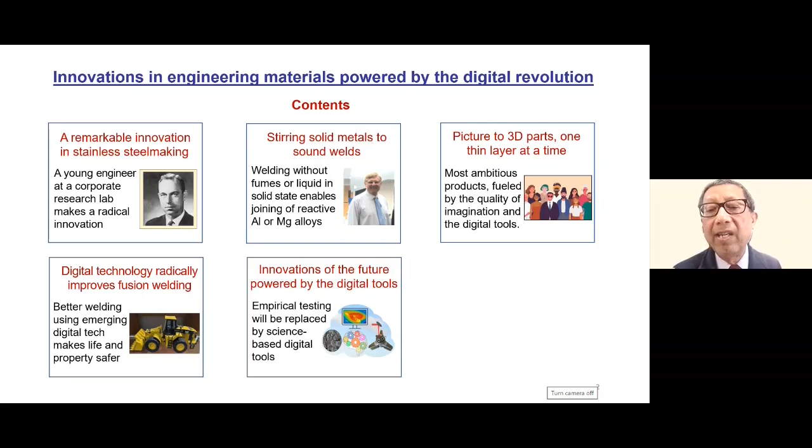Finally, I cannot overlook that this is a talk in which many of the interested people are in the sector of automotive and farm equipment. So I want to talk a little bit about some work we did for Caterpillar and what we have learned from those types of work, specifically emphasizing how digital technology is radically changing the way we answer important questions of industry, and also how we solve day-to-day problems. And finally, what about the innovations of the future? How are they going to be helped by the emerging digital tools?

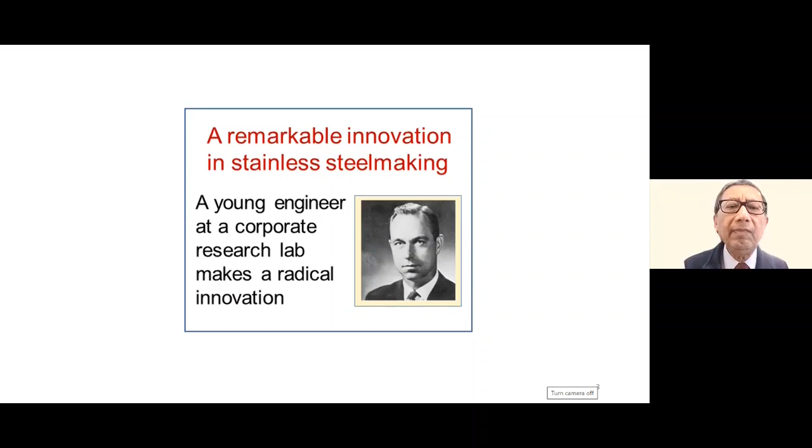So in order to avoid the oxidation of chromium, we first oxidize carbon, lower the carbon content to our desired level, and then add ferrochrome. Ferrochrome costs about $1 a pound for the low carbon variety. We cannot use the high carbon variety of ferrochrome, which costs much lower, 50 cents per pound of chromium, because if we add higher carbon containing material and try to oxidize that, we will oxidize chromium as well. So selective oxidation of carbon is not possible in the electric furnace.

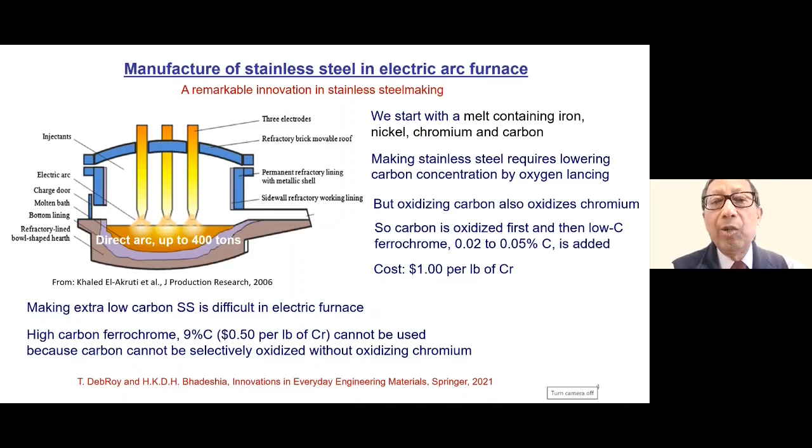That was the problem. Now I switch gears, and you have the context. I want to take you to a story of a fresh graduate obtaining his doctorate and joining the Union Carbide Company in Niagara Falls, a city most people visit for a very different purpose. You know what that is. But Krivsky, the young engineer, 27 years old, was doing experiments using iron carbon chromium melts that he was oxidizing with pure oxygen. The purpose was to create thermodynamic data in the iron carbon chromium system.

So he found after one or two experiments that the temperature of the bath was shooting up to about 3000 degrees Fahrenheit because of exothermic heat. So he thought this is not acceptable. He needs to maintain the temperature to a constant lower value. So he thought he would reduce the oxidation rate.

After all, rate has nothing to do with the thermodynamic equilibrium. So he diluted the oxygen with argon, expecting that the rate of reaction would be lower, and so he would be able to do isothermal experiments at lower temperature. He did a couple of those experiments, and to his surprise, he found that the carbon content was very low, lower than 0.01 weight percent.

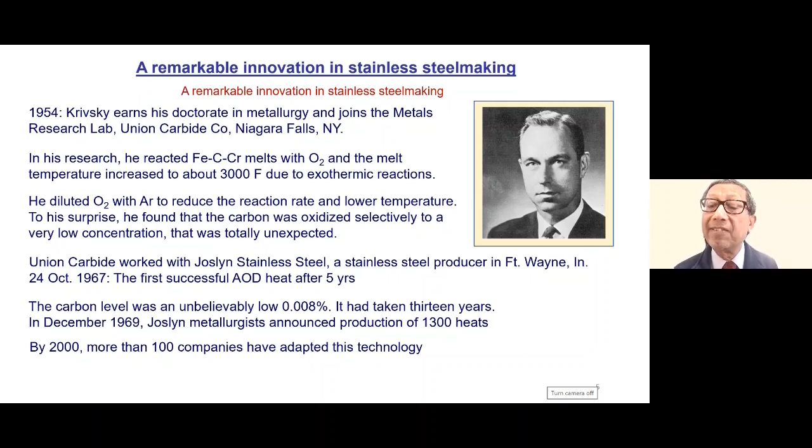They are lighter than the metallic melt, and at that time, chromium oxide gets reduced by the carbon in the melt to form chromium. So we don't lose chromium as chromium oxide anymore, but we recover almost all of the chromium in the bath. So we can selectively oxidize carbon without oxidizing chromium. And this is the ultimate in stainless steel manufacturing.

And carbon monoxide gets diluted with argon gas. So because the partial pressure of carbon monoxide is reduced, the forward reaction goes at a very high rate and we recover all the chromium. Remember that high carbon ferrochrome can now be added because we can oxidize carbon without oxidizing chromium.

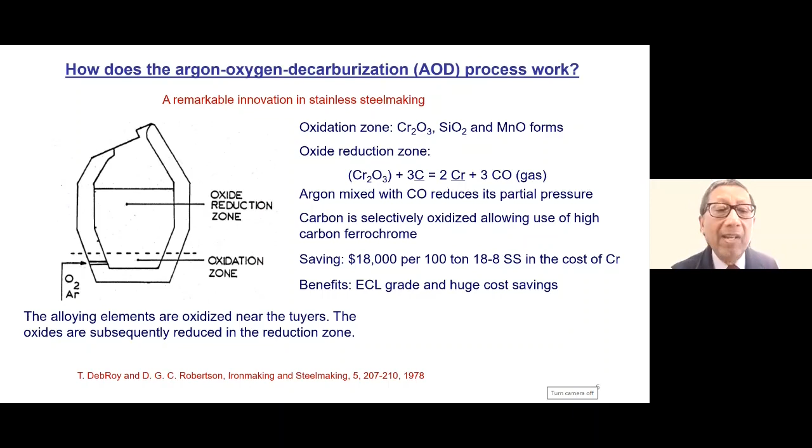Now, what made this innovation possible? Of course, Krivsky expected to write technical papers, but his research did not end up in equations, charts, and research papers. It ended up as something very radical in the stainless steel industry that touches the lives of all people in the world. And this disruptive technology, of course, started with the spark of an idea, but it didn't stop there. There were lots of hurdles, and it took about 13 years total, in which nobody gave up, particularly the corporate R&D. They supported him and they supported other subsidiaries to make this innovation possible.

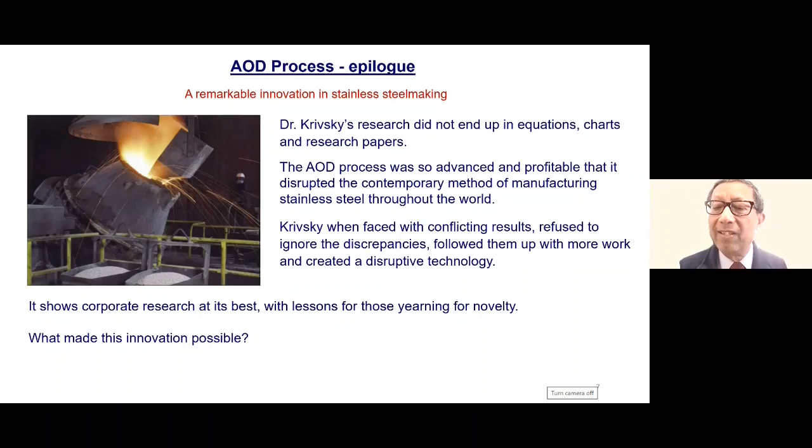I want to change gear and move to another innovation that is equally astounding. This is Dr. Wayne Thomas at TWI, which is a research organization for welding.

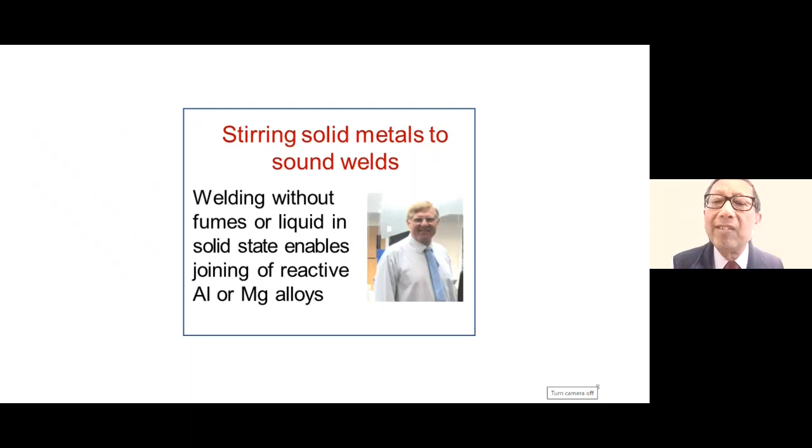And he was playing with friction welding, and he found that sometimes it is very easy to generate a lot of heat without melting the materials that we were supposed to join. And it works like this.

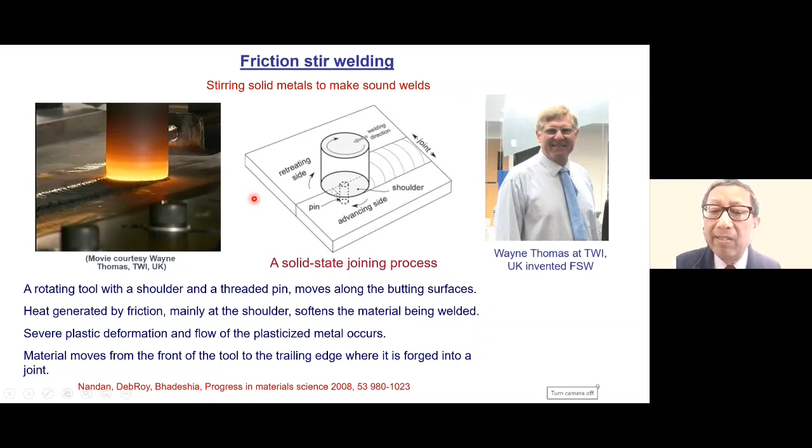There is a tool with a large shoulder and a tool pin. The tool rotates at a high speed with a large amount of friction between the tool shoulder and the material. As a result, we generate a ton of heat so that we get white hot temperature at the tool, but no melting, no fumes. The metal is plasticized. It moves to the rear end of the tool as the tool moves forward and is joined.

Now, most of the work was done on aluminum alloys, and today, the world's largest robotic friction stir welding machine stands 52 meters tall in New Orleans, at a facility owned by NASA that makes the world's most powerful rockets. You are seeing the picture of a liquid hydrogen tank that can hold about 537,000 gallons of liquid hydrogen.

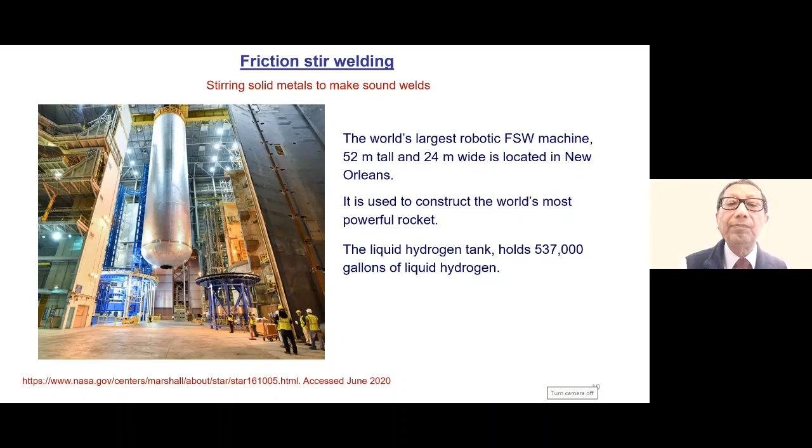So this is a very critical application, but NASA uses friction stir welding technology for their rocket engines. Here is a senior scientist talking to his grandchild, and he says, this part can only be made by friction stir welding.

And the grandkid asks, no melting, no fumes, no sparks flying. Is this really welding? This is pushing the limits of technology.

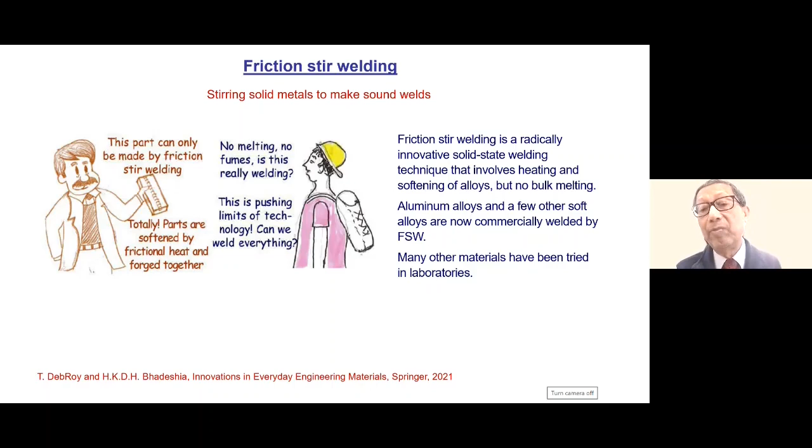Can we weld everything? Of course not. We can right now weld very ductile alloys like aluminum alloys, but we are trying to make this possible for other materials like steels.

So what happens when we try to do that for steels? Somebody has an idea and the perseverance to make this demonstration and show that it is economically very attractive to weld aluminum alloys, particularly for the automotive and farm equipment sectors.

Here is the problem. The senior engineer goes to the CEO and says, we could weld aluminum alloys very well, but when we try to do this for steel, we have a huge problem. The tools endure a lot and ultimately they break. At what cost? $150 a meter? No, that is too much. And the CEO is stressed out.

So it falls on researchers to find a solution. And one of the tools that we have developed in the last 20 years or so is to simulate. Do the work in a computer before you actually weld the stuff, because then you can learn what the outcome is going to be. If you don't like the outcome, you change your parameters. You can test out numerous different scenarios before you spend money and time. This opportunity was not there before.

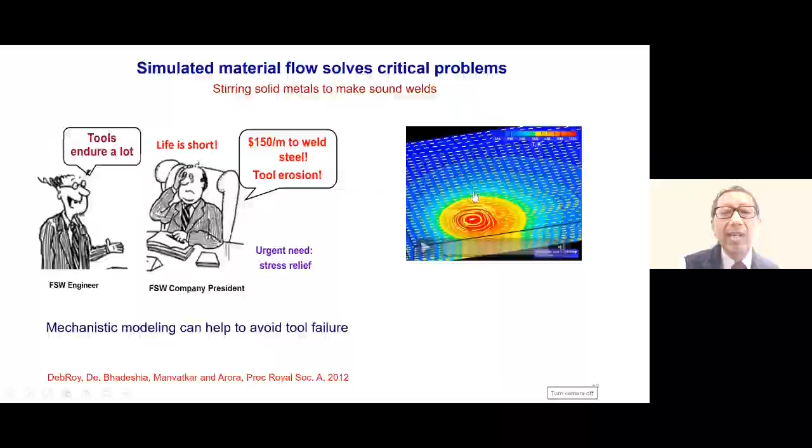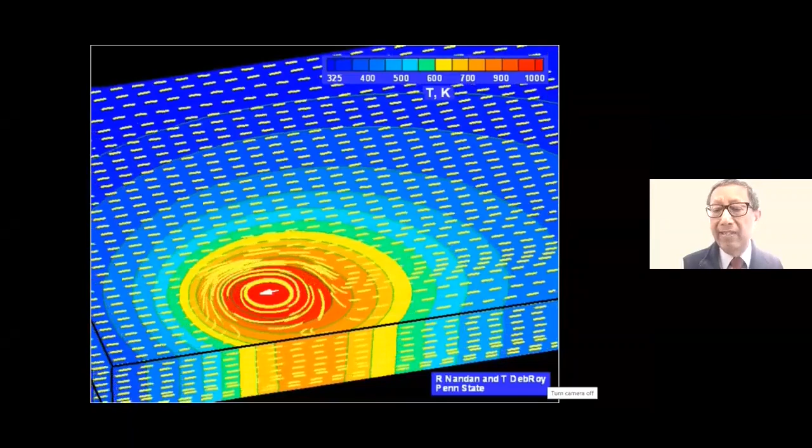So I want to show you what the simulation looks like. Here is a simulation, with the tool right in the middle where the arrow is. It is generating heat, and the colors in different locations indicate temperature. We can also calculate the stresses on the tool, the torque, and so we know the outcome before we actually do a single experiment. This opportunity was not there before computations became inexpensive. A $600 laptop can simulate the process in less than half an hour.

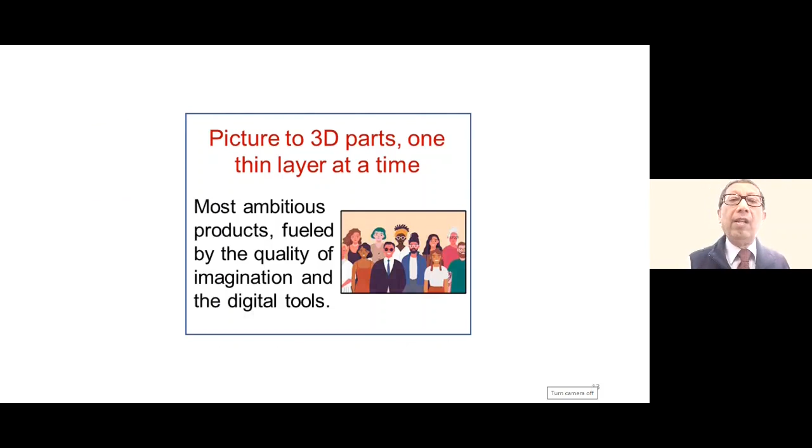So I want to change gear again, and take you to a radical innovation that took over 20 years to mature. Things that seemed impossible just a few years ago can now be made. So what happens here? We make 3D parts, one thin layer at a time. How thin? Sometimes thinner than a human hair.

So here is a powder bed fusion process in which we can make complicated shapes. We can make site-specific chemical composition of a material, and we can make stuff that has internal cooling channels, very attractive for the automotive and farm equipment sector. And most important, the same equipment can produce one component today, and tomorrow if there is a need for making another component, that can be made as well.

So what happens is we spread a thin layer of metal using a roller and then use a heat source, in this case a laser beam, and we melt selected areas of this layer. Then we spread another layer and do the same thing, progressively depositing many thin layers to make a 3D component.

In this case, I am showing a Nittany lion, our mascot for Penn State, being made by the powder bed fusion process. There are other varieties of additive manufacturing called directed energy deposition using a laser beam or an electron beam, or directed energy deposition using an inexpensive gas metal arc heat source.

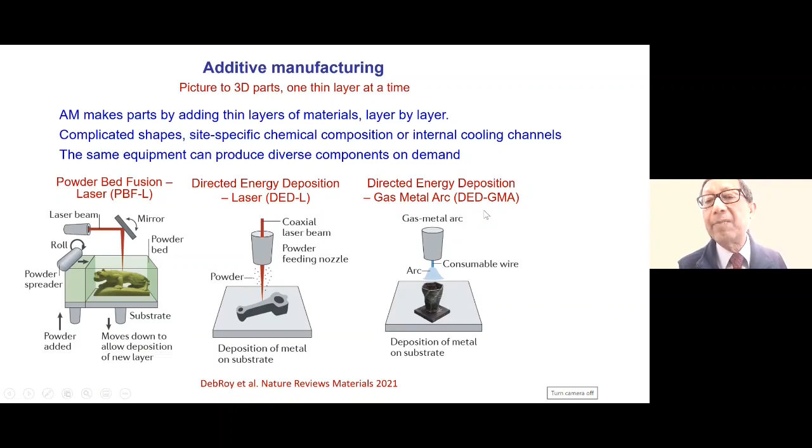So what are the unique advantages of this type of deposition? General Electric, the largest manufacturer of jet engines, uses a factory in Alabama to make fuel nozzles. Fuel nozzles used to be made by assembling 20 parts, and today it can be made as a single part, and it increases the reliability of jet engines.

We can make compositionally graded materials. For example, here we have chromium molybdenum steel joined with a nickel alloy 800H. This joint of dissimilar metals is a common thing in the nuclear power industry. We did some research to show that if we can avoid this dissimilar metal joint, which has a severe creep problem after about 30 years, and replace it with a graded joint in which the composition changes gradually, we can increase the creep life by many, many decades.

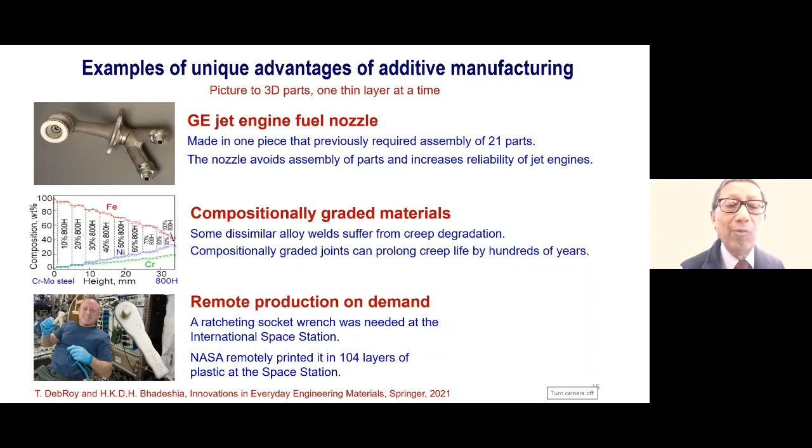One last example: the International Space Station had a message for NASA that they needed a ratcheting wrench, and NASA had no resupply mission planned. So what NASA did was send a design for a 3D-printed socket wrench to the space station from Earth, for the desktop printer inside the space station. They remotely printed a ratchet in 104 layers of plastic at the space station, and all the commander had to do is open the drawer and pick it up.

That's it. So what do we make today? Starting from a pulley to a hip joint, to gas turbine blades, to fuel nozzles, to hydraulic valves, to a customized bottle opener. Everything can be made. But does that mean innovation has stopped after we've devised a way to make it?

Not really, because how many commercial alloys are there? Over 5,000, right? Of those 5,000 alloys, we can now print only about a handful, maybe 10 to 20 alloys. The other 4,980 alloys cannot be printed.

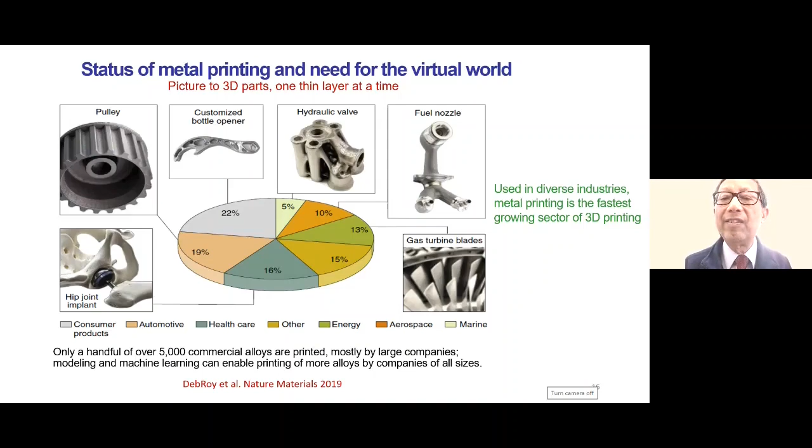But there is hope, because we have a rich and mature knowledge base of metallurgy. We have emerging digital tools, and we have lots of small and medium-sized businesses that are eager to play in this market. But they have to solve many defects such as cracking, surface roughness, lack of fusion, porosity, a ton of other problems, and not least, cost competitiveness. Products have to be such that the market can bear their cost.

But here there is an opportunity roadmap. The roadmap is to integrate emerging digital technology with existing hardware, which will give us rapid solutions so that it doesn't take 13 years, as it did for stainless steel to develop. And most important, these will be based on scientific principles, not trial and error, cut and section and try it out, but using mechanistic models, machine learning, and ultimately digital twins.

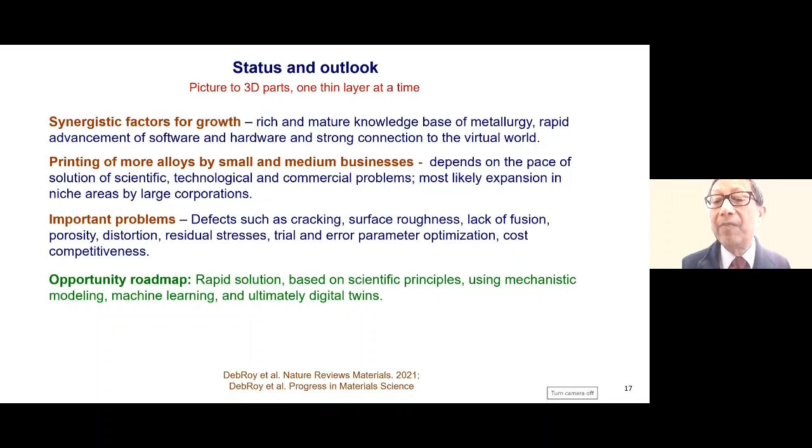General Electric has 5,500 digital twins. Siemens has thousands of digital twins. So this is an opportunity roadmap. Please ask if you can take advantage of the most modern science-based tools rather than do-and-see approaches.

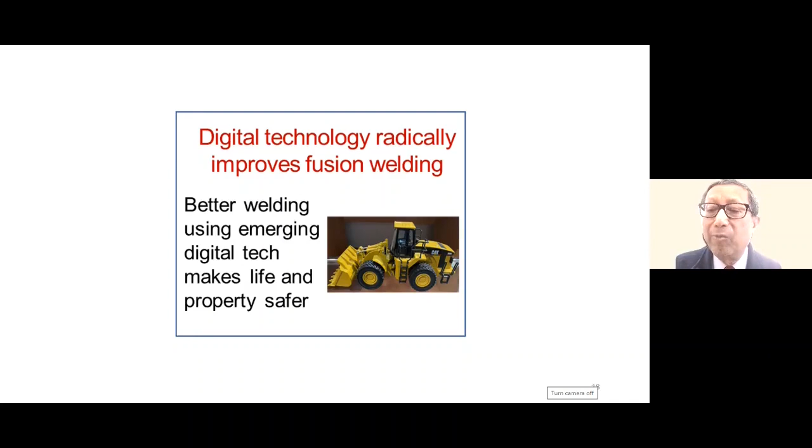I want to tell you about the application of digital technology, some work we did for Caterpillar, who make a lot of earth-moving equipment. If you section a weld, you can see all of this. How do you know what is happening in the interior of the material that you are trying to join? And why is this important?

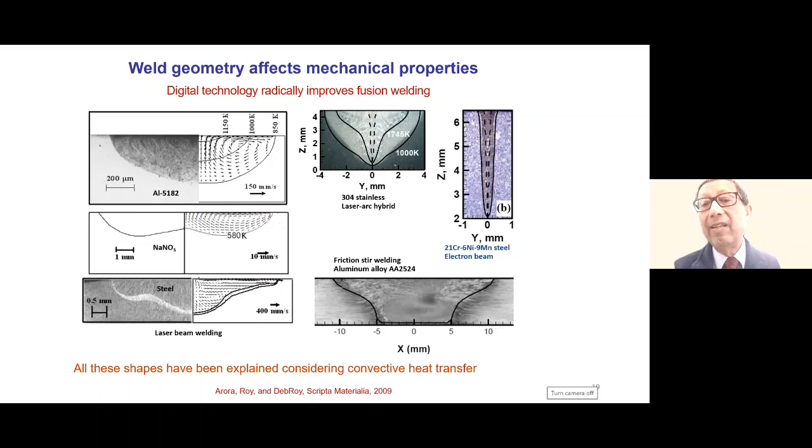You have to ask, if you are an engineer, how is this material going to fail, if it fails, God forbid. And the answer is very simple: most of them fail by fatigue. So you have to increase your design's fatigue strength if you are doing welding.

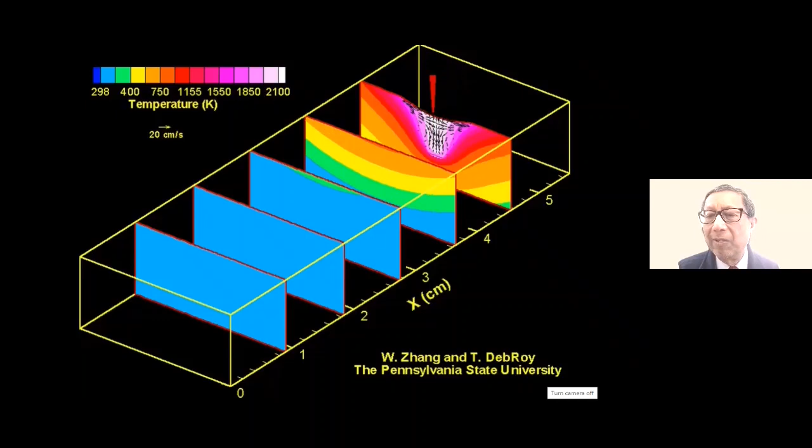I want to show you a simulation. You see the heat source is moving, pushing the liquid backwards, and forming a shape, a weld bead, if you will. The key to increasing fatigue life in the automotive and farm sectors is to have the right bead, because that will give you 1,000 years of fatigue life, and you want your quality to be very good. So here is a weld, a gas metal arc weld, and you see this dome here.

This contact angle decides whether this edge is sharp or not. If you have a very sharp edge, then the fatigue life would be lower because a crack can initiate and propagate. So improper parameters will give us poor geometry, poor mechanical properties, and God forbid, catastrophic failure.

How do you increase fatigue life for this material? You decrease your angle theta. Basically, you change the toe angle and the reinforcement height. That is exactly what we did.

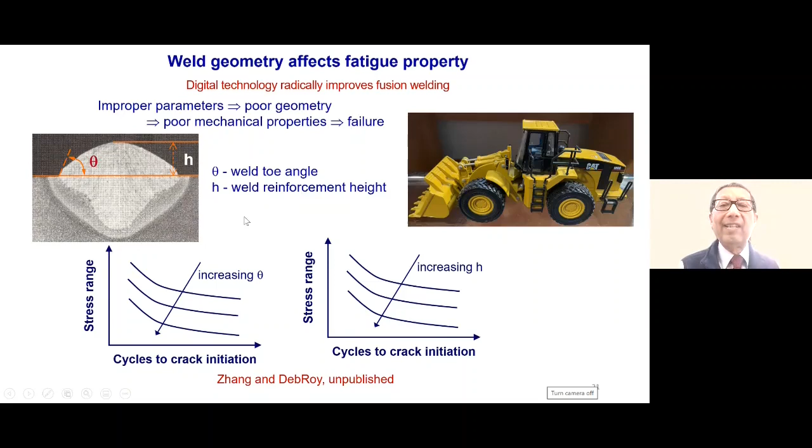We did simulation and we showed that before they do the welding, we can tell them what's going to happen if they did the welding. And they wanted to test us, so they did lots of experiments. And each case, here are the results.

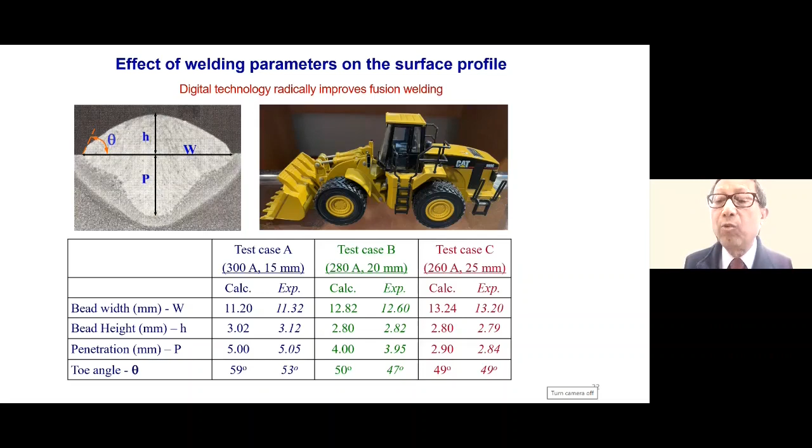So simulation is trustworthy, it is better than trial and error, and it can be relied upon. And most important, you are taking advantage of all the scientific knowledge in the form of a virtual welding, before you do the actual welding. And this is a pictorial view that this can be done.

And in innovation, many of the whys are as important as whats, if you want to make use of the scientific knowledge. So simulation is scientific knowledge in digital form.

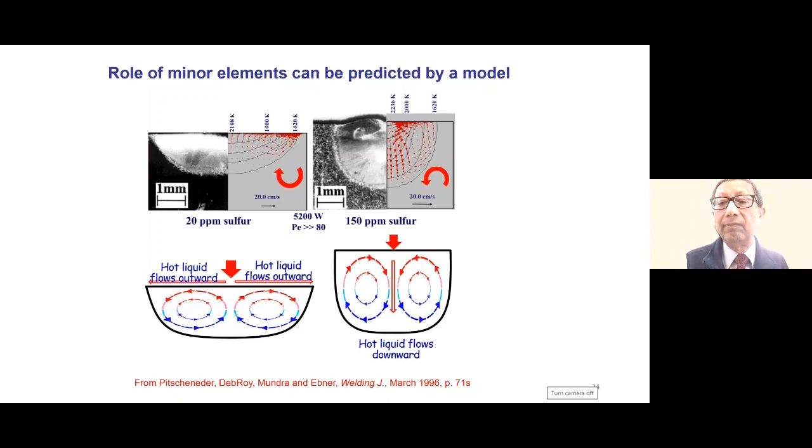My final comment, innovations of the future. How can you make a culture in which innovation is promoted, and is promoted not by the elites, it's promoted by everyone that wants to do it. So that it does not matter if you do your experiments in Bangladesh or Bangalore or Abuja, Nigeria, or Stockholm, Sweden, or University Park in Pennsylvania, where our offices are, and we do simulation all the time.

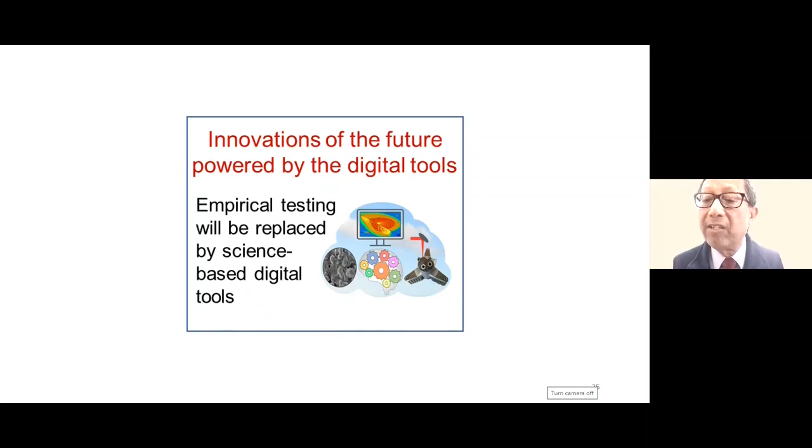Critical problems in manufacturing are solved by time-consuming and expensive trial and error, do and see, and make parts and test it. So you need expensive equipment, you need a big laboratory, and it is time-consuming and expensive. And there is an opportunity roadmap here.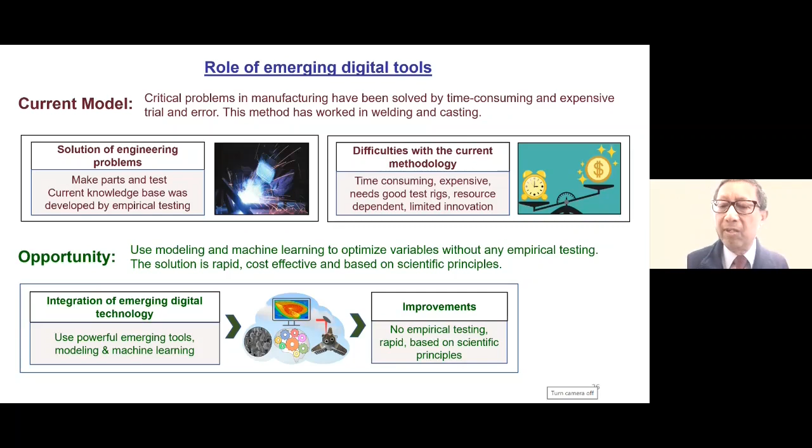Use modeling and machine learning without any empirical testing initially, and optimize your parameters, and use this scientific knowledge. Use the spark of your imagination that has no substitute, but also use this science. And what will happen? You will improve the quality without trial and error, and then make a few tests to verify your predictions. So there will be fewer defects.

You can test out different materials without doing experiments or without ordering new materials from your suppliers and paying for it. So it'll be cheaper, it'll be based on scientific knowledge, and your products will be certified much quicker. This new path will allow your technology to mature quicker.

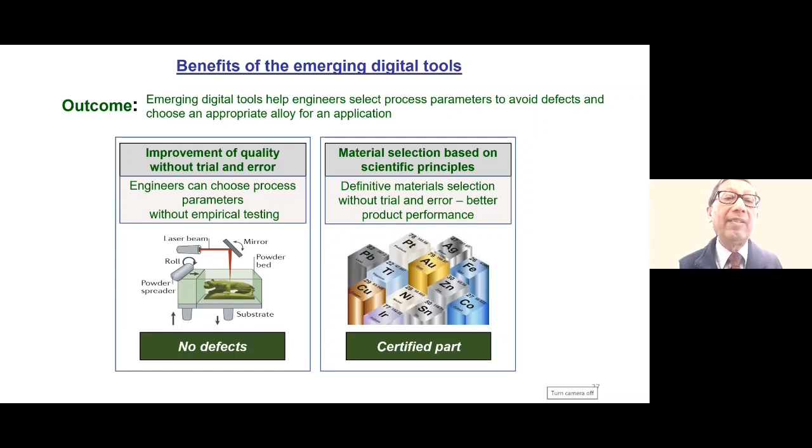You will not need big test facility, you will not need specialized equipment, and most important, everyone with a $600 laptop can participate. So you will enable and empower all your employees that want to do it. Ideas will be valued and not the attributes that divide us, because everyone will be able to participate.

So race, religion, ethnicity, nationality, affluence will not matter. Researchers without expensive facilities can contribute, and this will make the world a more inclusive place. When you empower people, you promote innovation. When you make people valuable and listen to them, everyone benefits. All people in the world will benefit in this paradigm.